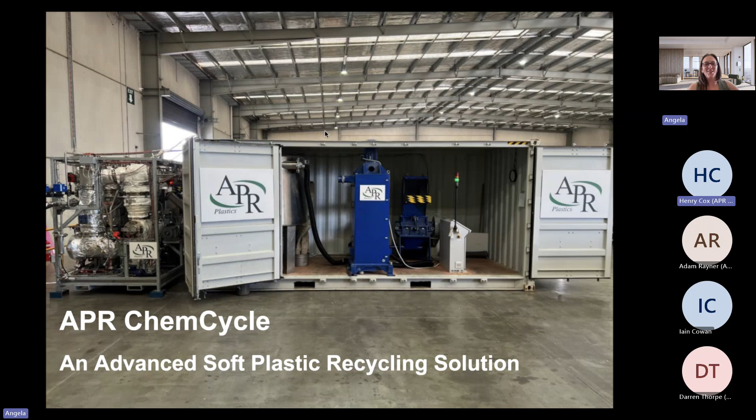First of all, we just wanted to give an acknowledgement of country. We wish to acknowledge the people of the Kulin Nation on whose land we're meeting today. We pay our respect to the elders past, present and emerging. Now I'm going to hand over to Darren, so Darren, all over to you.

Fantastic. Thanks, Ange. Yeah, welcome everybody. This is a really exciting time for the sector, and we're very, very excited to be part of this mission of ours that we started back in 2002 when the APR Group, or as it was called then, was Australian Paper Recovery. We moved into, started initially with paper and cardboard, and we moved into soft, clean, clear film, which was a problem to the cardboard.

So we started to sort of separate that in 2009, and that was turned into builders film in Malaysia, and we now still import that, and hopefully sooner rather than later we start manufacturing that here in Australia. We do 100,000 rolls a year on that commodity, so we're certainly going down the path of advancing that as well.

So we moved along to 2018, where we started APR Curbside, and the reason we got into that is because everyone kept telling me to get involved, because it was broken in a lot of people's eyes, and 2018 was the turning point. We introduced glass out, and that became very popular.

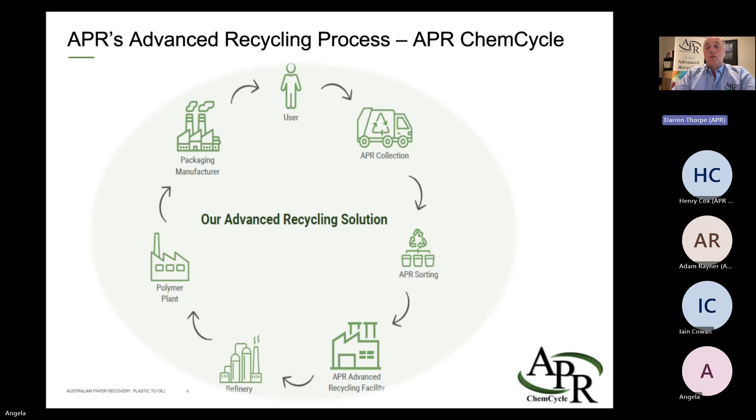We'll go to our sorting facility, then through this facility in Bacchus Marsh, our advanced recycling facility. The oil we produce will go to the local refinery in Geelong or alternative options overseas. We'll turn it into a polymer - at the refinery they'll make olefins, then at the polymer plant they'll add poly to make a polyolefin, or send it to a packaging manufacturer to make the sheet of film again, and then they'll go to the brands to put that barrier in, which has always been problematic for mechanical recycling because they can't separate it, whereas this process will.

As mentioned earlier, sorting plants in Dandenong will move it to our advanced recycling plant in Bacchus Marsh, and we're talking to the local refinery in Geelong, and also having some robust discussions with opportunities in Singapore.

The roadmap, as we've been moving along this mission, started with some R&D in 2019 to 2022, where a pilot plant was commissioned, which has given us a lot of learnings, so we can roll through to the demonstration plant, which is going to be 10 tonnes a day, in the third quarter of 2025.

Then we'll do some scaling up from that once the concept has been proven to work, which we're very confident of. We'll get some pre-engineering work and selection of a technology partner to take place in 2025-26, to commission a larger plant to see some real tonnes being recovered.

I might hand over now to Henry, our pyrolysis operations manager, to take you through a bit of the detail of how it all works. Thanks, Darren. So as Darren's alluded to previously, the feedstock is pre-sorted.

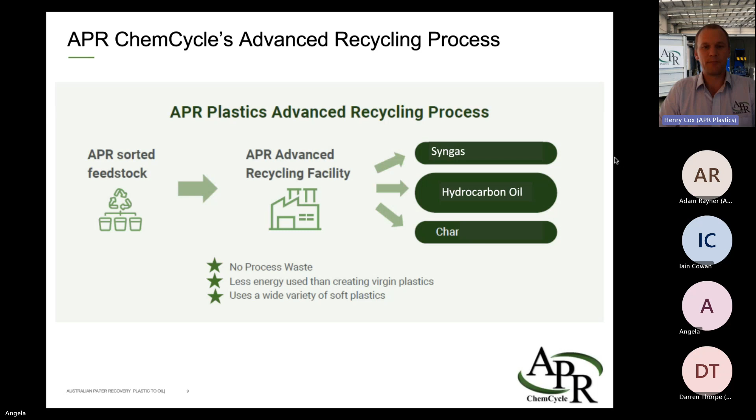We will sell the oil - that's the main component of what we're doing here, creating this hydrocarbon oil, and we're going to sell that to the refinery. The char will go on to become an additive in asphalt or concrete to improve those properties. Thanks, Ange.

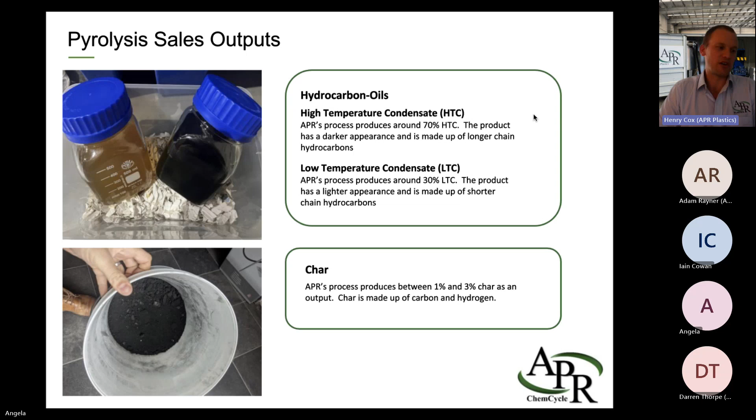So these are the outputs here. We've got a high temperature condensate and a low temperature condensate - a heavy and a light oil, if you will. One almost looks like a light kerosene or petrol, the other looks like a very dark oil, but it's still quite viscous. The third output we just spoke about is char, which is mainly made up of carbon and hydrogen, and that's going to be on-sold to people that use that in their process.

Thanks, Ange. At the start of the process, we create a tiny little bit of dust and fines, and that is captured and sent to landfill. And as I said, the syngas that is produced is thermally oxidized, completely combusted, to reduce emissions.

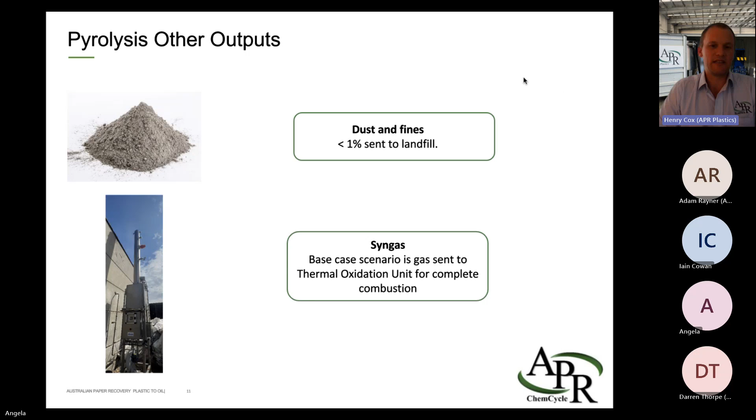We started this project, as we said, and we've learned a lot from this project in Dandenong. Really from 2019, the equipment arrived, and you're looking at it here in 2022. This is effectively the same technology as what we'll be using in Maddingley, albeit a scaled up version. We've learned about all the occupational health and safety and environmental outputs from this plant, which has given us the confidence to go forward and build this plant in Maddingley.

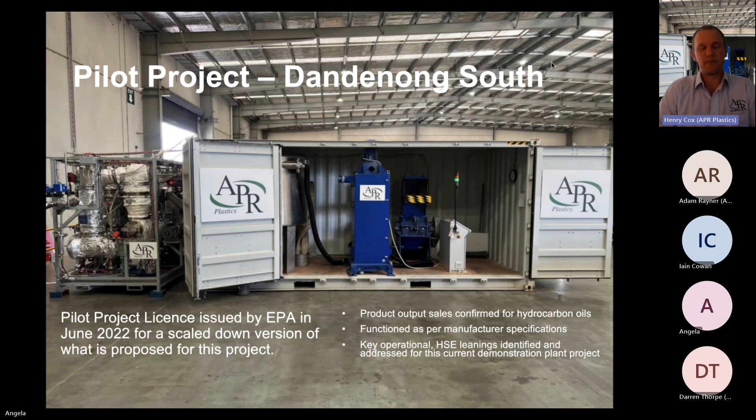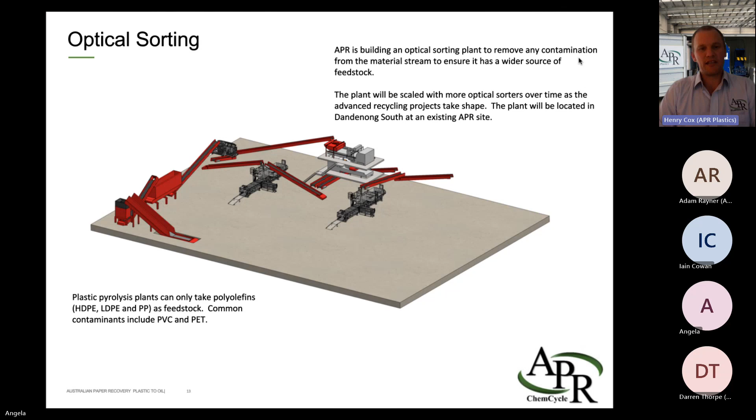The optical sorting that we've got here is what we alluded to before. This is a process which removes non-plastics and removes non-polyolefins. Think about a classic case with biscuits and the biscuit wrapper - the biscuit wrapper we can take, but the tray we cannot take. This will automatically remove the tray because it's made of PET. So at the end of it, we've got a nice clean feedstock. Thanks, Ange.

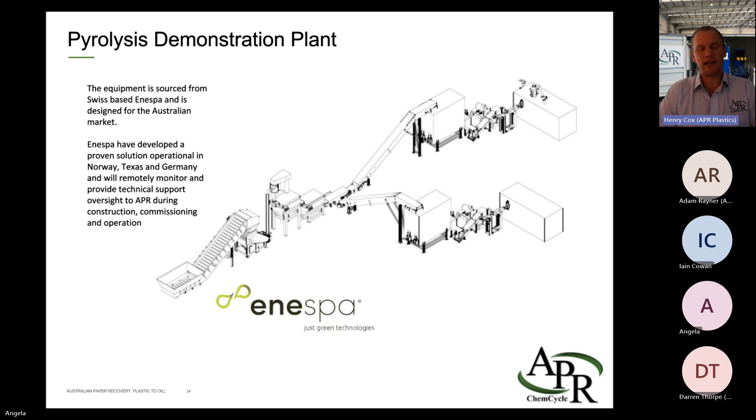This is a little sketch of our demonstration plant, and if you see those two cubes at the end, they're essentially 20-foot container cubes. You've got at the front a granulator, which downsizes the plastics, some dryers, a buffer box, a plasticizer which densifies and partly melts the plastic, and an extruder which feeds the reactor. The equipment is being developed by Enespa, a leading company for modularized plants like this in Germany. They've got a great track record to remotely monitor all the equipment while it's running, and will be an active part of the project. Thanks, Ange.

This is a little layout of the site, and as you can see, the overall footprint's around 3,000 square meters. The shed takes up around 2,500 square meters. What you've got here is the layout of the equipment, some tanks, and a loading bay for a truck. This is going to be within the JBD industrial zone in Maddingley, nice and safely out of the way, with a pretty minimal impact on the surroundings.

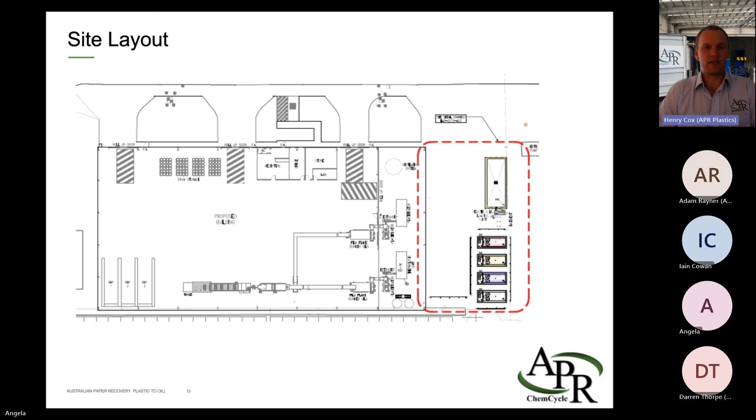Just for context, here's the 20-foot shell that contains the reactor and the condensation units. The condensation units are the guy in black with the black trousers on the right. The reactor is the thing that runs horizontally across your screen. So that's the scale of one of them, and we're going to have two of these on site.

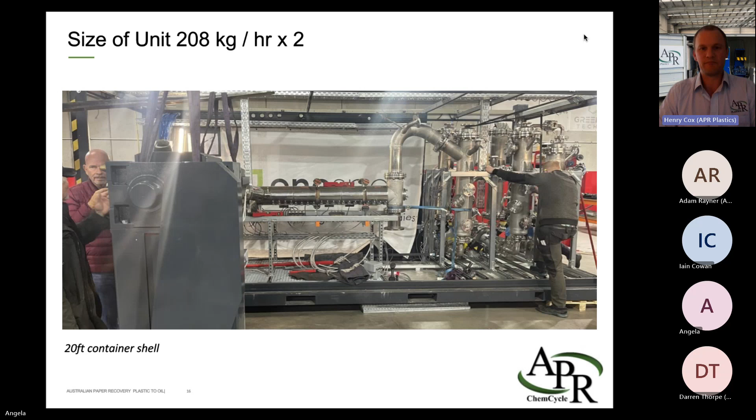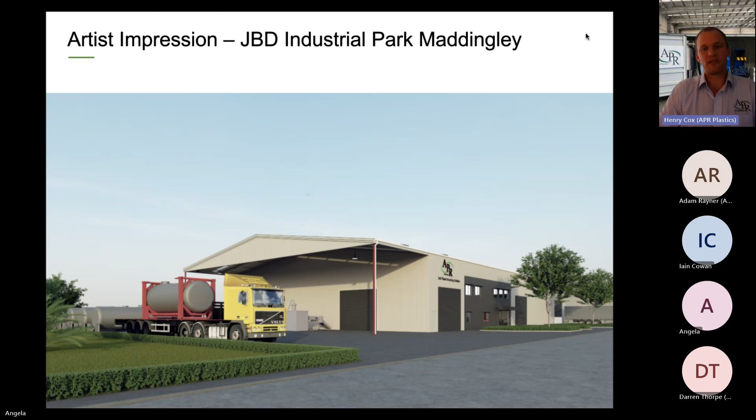There's a bit of an artist sketch of the facility from inside JBD Industrial Park, looking west and southwest. So yeah, it's a fairly standard shed with a canopy, or a facility with a canopy. As I said, this is an artist sketch, but we hope it's going to come up and look really good.

G'day everybody, I'm Adam, APR Group's Environmental and Strategic Planning Manager. Just going to have a bit of a chat to you about human health and environmental considerations.

We're operating the new demonstration plant with best practice emission controls. We're managing things like stormwater and firewater, designing the site and the catchment area to make sure no contaminated liquid gets discharged off the site or off the premises at all. That includes the truck filling area that Henry was mentioning before, having a triple interceptor, and having the testing and maintenance on that to make sure we're treating any potentially contaminated stormwater, liquid, or runoff before it goes off site.

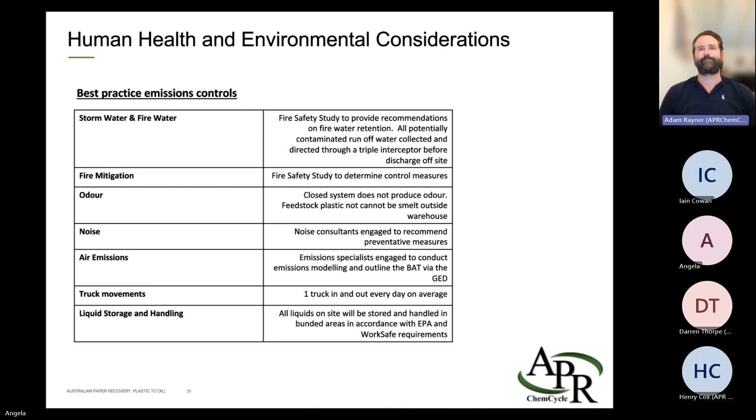Iain, did you want to just have a quick chat to everybody about air emissions, just in case there were any concerns about that, please? Yep, absolutely. So there are three potential points where air emissions can go to atmosphere.

One is at the extruder. Any emissions from there are captured via a range hood. They pass through two pieces of control equipment which remove particulates and any volatile organic compounds before some residual goes to atmosphere.

The second part is the syngas, as has been mentioned, is sent to a flare. It's an enclosed flare, so essentially it goes up a stack. That has been set to reduce the emissions coming out of the syngas by 99%, reducing it to a very low level.

And then the third aspect is the storage tanks. There's only a very small emission that occurs here when the tanks are being filled - it's the liquid filling the tank that then pushes the air out, and there's emissions from that.

We have been through an extensive review to look at all of those emission points to consider what are the best available technologies to reduce emissions from those to the extent so far as reasonably practicable in accordance with the general environmental duty. The residual emissions have been put into an atmospheric dispersion model to determine the residual impacts to the surrounding land use, and the assessments will be submitted to the EPA as part of the development approval application.